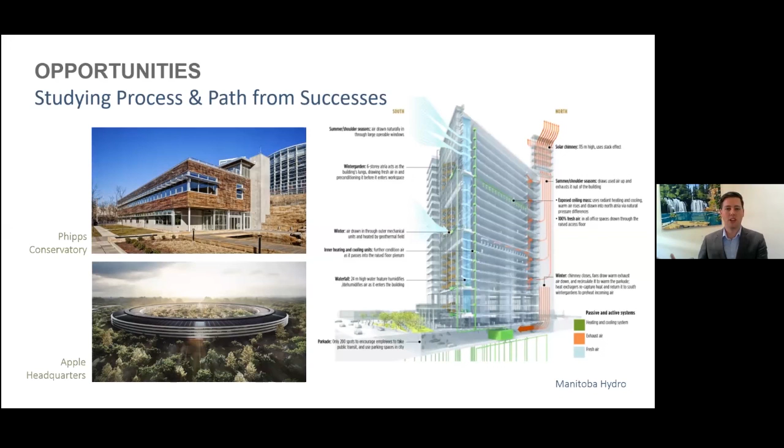Find projects that have successes and then identify ways that they were successful. So call people, try to find resources on the internet, and not necessarily what the end solution is, but more the process or the path that that design team went through to come up with that final solution.

And this was one that I think is really challenging within Branch Pattern, but also challenging within our industry: we have municipalities that are pushing us, which is fantastic, to energy efficiency design solutions. Our codes are catching up to that, but from a design standpoint and a construction standpoint, I believe it's going to be really difficult if we don't have a really good plan in place to hit those goals that we have to get to net zero carbon or net zero energy.

So next poll question here is, if you can pull that up, Danny, how many projects do you set goals for occupant comfort, health and wellness, energy, and long-term costs?

I see that I have skipped over a poll question. Sorry, I don't mean to leave you guys out here. So we'll jump into another poll question here in just a second. I tried to get to that 70%. Okay, there we go.

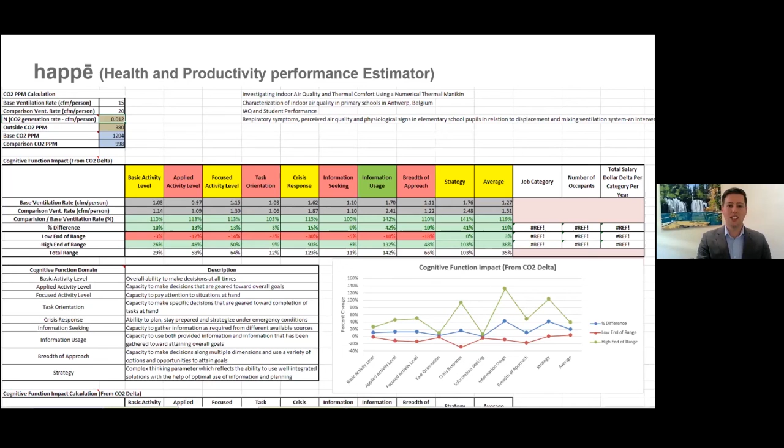So this is a really neat tool that we've been able to use a little bit, and we'd love to use this more often. It's really, really effective for creating great indoor environmental quality, and has the data to back it up.

That same client was looking for really good daylighting in the space, so we took that first calculator, which said we need this sort of quality of daylighting, and we were able to analyze and tweak the architecture to make sure that what we were shooting for was actually being met from an analysis standpoint. And then at the end, which I'll talk about in a little bit, we were able to verify that what we had designed for was actually being met in the end.

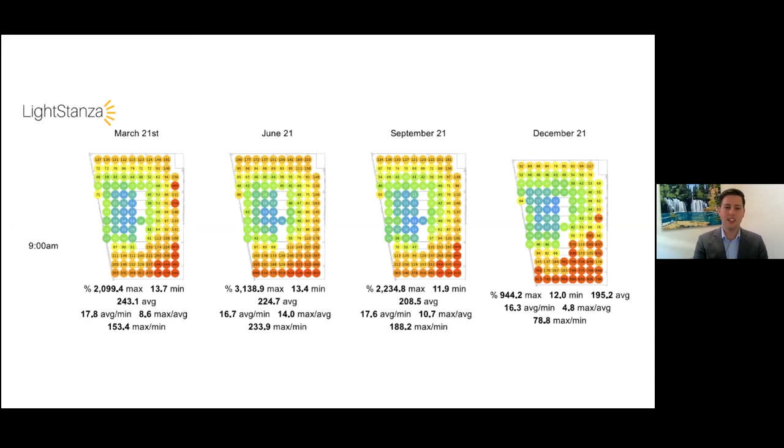Another client that we were working with, similar case, they wanted really good indoor environmental quality for their students to learn. And so our group, and this is not really me at all that is doing this, we have some really, really smart people at Branch Pattern. So Marcel, our anthropologist on staff, he pulled together all of this information to help us understand what was the most effective ventilation rate, where we were not going to increase energy consumption within the building.

So this client had a balance that they required, where we had low energy usage, but really good indoor environmental quality. So that meant that we needed to increase ventilation in the building, which also increased energy. So what we were trying to do with this study and with this data collection was to find that optimal point between the two. And what we found here was that what we should be shooting for is CO2, carbon dioxide, parts per million in the building to be somewhere between 1,000 and 700, and we were shooting for somewhere in the middle, which was about 800, 850. And I'll show you the results of that here in just a little bit.

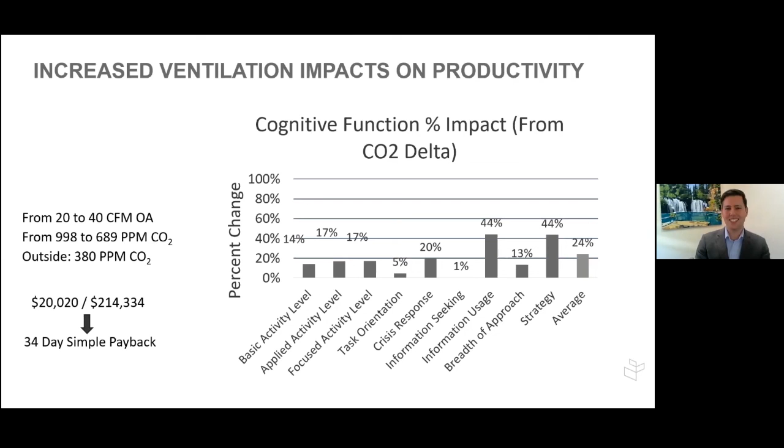The next thing is that everyone on the team must be able to iterate and iterate quickly. And a lot of times that's difficult for especially engineers who are linear thinkers compared to designers who are more iterative thinkers or revolving thinkers. So this is kind of our take on requiring or pushing our engineers and architects on staff to be iterative thinkers. So during the discovery phase, being able to think about a lot of different solutions, come up with a lot of different what if scenarios so that we can analyze and then be able to converge in on a solution.

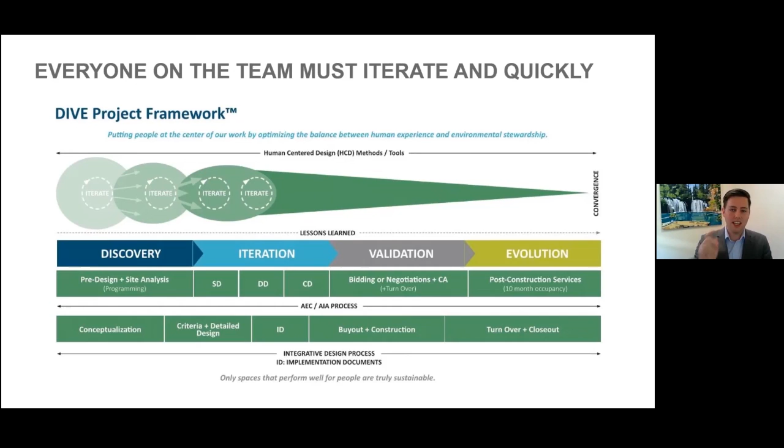I won't go into much more detail about our DIVE project framework, as we call this. But if anyone wants to know more, I'd love to talk more about this down the road. But the idea here is that we're iterating, and we're iterating quickly so that our analysis and our data is actually being used to inform the design. What oftentimes happens is the data is slow to get to the decision makers, and by the time it does get over, the design has already iterated 4 or 5 times and is past the opportunity to be effective.

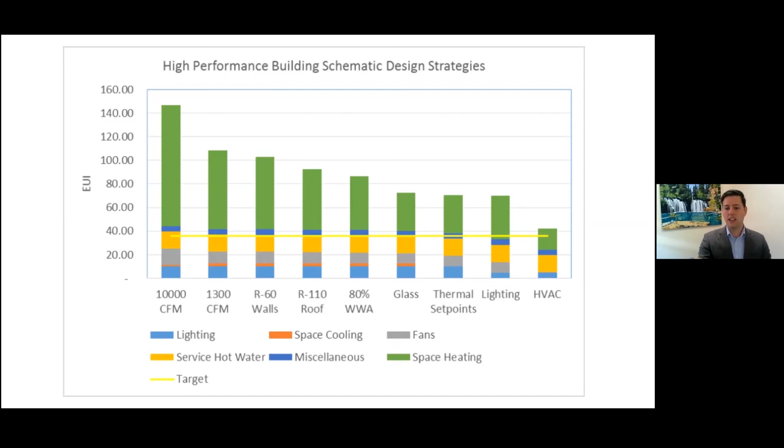So here's one example of a project that we were working on where energy was the driving factor. The goal was to create the lowest energy consuming building that we could. And it had a kitchen in it, which if you're an energy follower, you know that kitchens use a ton of energy. So that was one of the places that we focused on first. There were a number of interim iterations between each one of these bar charts, but you can see the impact of each iteration that created this low energy consuming building.

Here's another quick example of iterating on geometric changes, architectural changes, really. So the goal of this project, which is up in the mountains in Colorado, just outside of Boulder, the hope here was that we were going to use no heating or cooling in the building. That's the best mechanical system, right? It's one that doesn't need heating or cooling. And so that was our goal here. So what we were looking at is how can we provide natural ventilation for cooling, and how can we super insulate the building so that the internal gains and the gains from the sun can heat up the space and allow us to float through the night.

So we were looking at the minimum temperature in every room throughout the building, and through a number of iterations, we were able to get the internal spaces, the lowest temperature, to be 63 degrees in that climate zone. So this was kind of a new way of coming up with data, but since we had that goal in mind at the beginning and we were able to iterate quickly with our design team, we were able to come up with a really good solution that made this project pretty special.

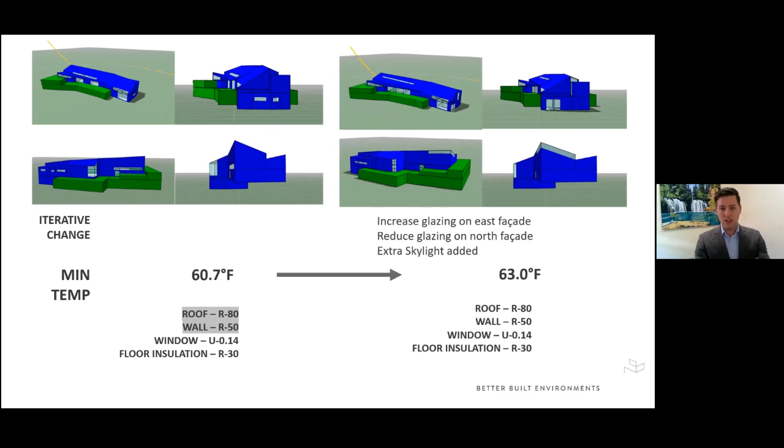And then finally, just a quick plug here in this little section is Cove Tool. If you have not heard of this tool, it is a really neat and robust tool that we've been using internally for really early conceptual design strategies and iterations. So it kind of helps at least limit the field or define the field a little bit better on different envelope types, mechanical systems, cost, EUI.

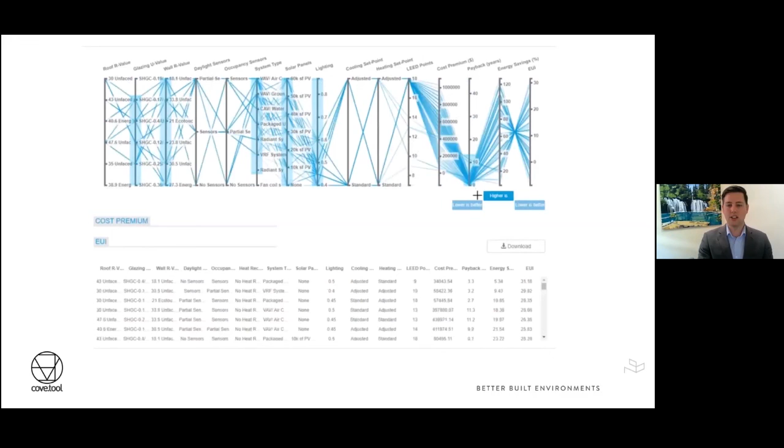So what you can do is plug in all of this information and then narrow down your field of what's most appropriate or reasonable to use within the building. So if you'd love to know more about that, that is a great tool. Check it out. It's cove.tool, and it's pretty user friendly.

So this was kind of a catch-all, but something that I saw made projects special, and I saw someone in the comments state this too, is having people on the team who think holistically about the building, not just within their silos. They can connect the dots for the team. Analysis groups are really good for that, or specialists on the team who can kind of jump between two different disciplines are just really valuable to have on teams, because they can see those connection points.

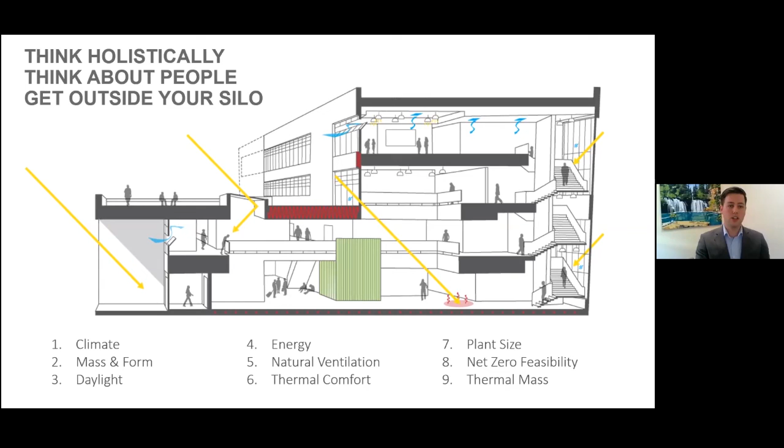So think holistically, thinking about people too, because our buildings are designed for people, and getting out of silos is really important. So I'm going to quickly go through just a case study of a project that we worked on,

and this was something that I actually created for this presentation here. So it's a library project. It's 20,000 square feet. This is a theoretical project, and pulling all of this data together, this one iteration took 30 to 40 minutes to get this information together. So it's not a really big effort to try to pull together all of this information, but it is really valuable, I think, and that's what I hope you get out of this.

So it's in rural Colorado, which is not a town; it's just outside of the cities, where the codes may not have caught up with today's current code. So you can see we're using ASHRAE 90.1 2007, and some of our insulation values or envelope values are located here. System, let's say we had that figured out as we were going into this analysis, and we're pulling costs from RS Means. So walking through this scenario, this is something that on every special project, if you will, we've done this sort of analysis on.

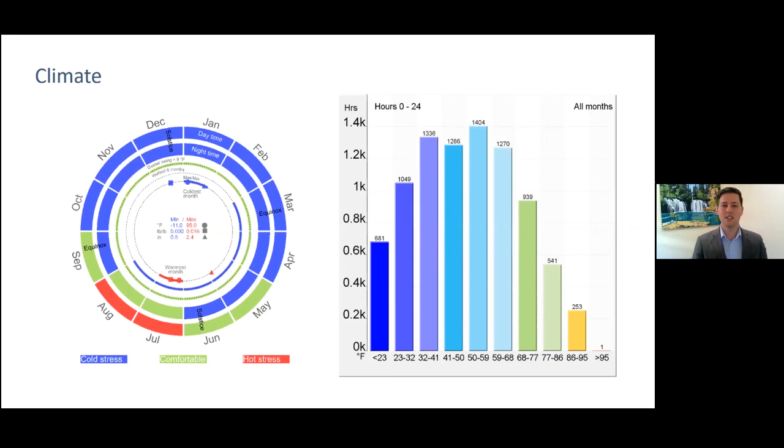So the first thing is looking at climate and really looking at opportunities within the climate to be able to work with the environment or work with the climate rather than trying to fight against it. Now, there will be some of that, right, on every project, but as I said before, the best mechanical system is no mechanical system at all, or a very small mechanical system that doesn't have to run very often. So looking at the climate for opportunities is really, really valuable.

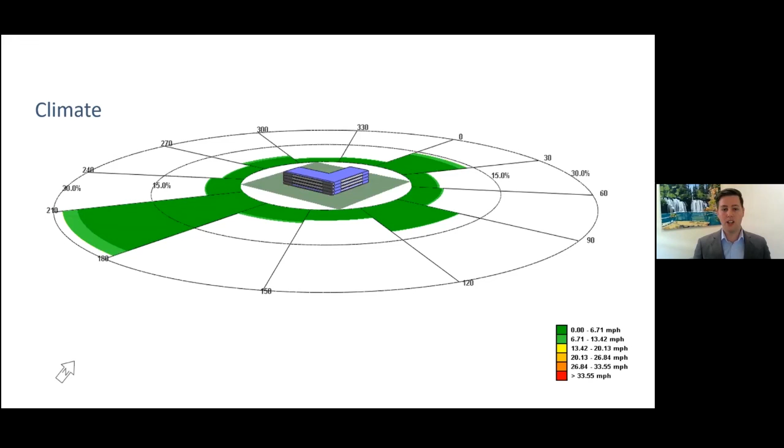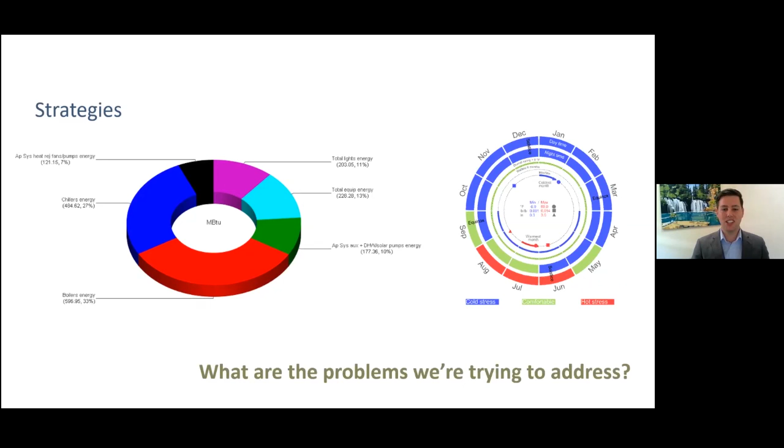Looking at wind within that climate, can we use the wind to our advantage? Do we need to block the wind for our advantage as well? So looking for some of those opportunities within the climate. And then looking at the building and how that building type is going to react to the climate and to the occupancy within the building. So really getting a good, firm understanding of what we're trying to target and where the problems may exist within the building. So here we can see boilers and chillers are going to be a pretty big target point or an opportunity for reduction here. And lights too.

So taking the time to orient the building and create different massing schemes, which is something that I'm sure a lot of you architects, 57% of the field out there, are doing. You're looking at different options. A lot of times we get constrained, right, on sites that are within the city, but if we're out on a greenfield site, we're looking at different massing and orientations.

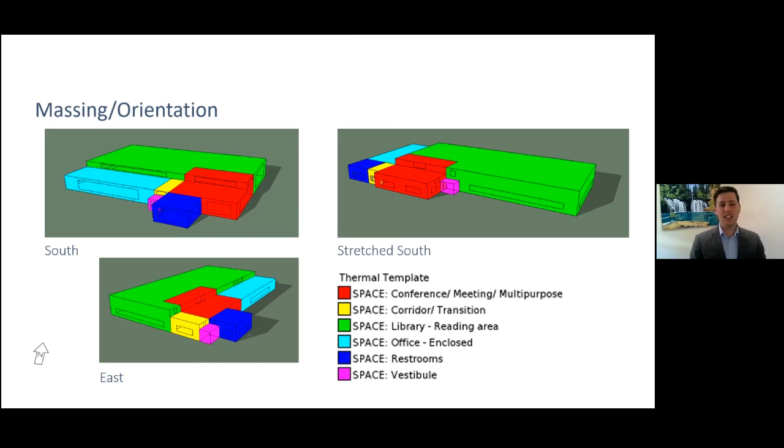So this is a really quick and easy way to understand how different orientations and massing are going to get different energy consumption values out. So we can see here, just by moving some of these different pieces around, you're able to get different energy consumption. So on this, by a show of hands, how many people tend to do energy analysis on their massing and orientation studies kind of right at the beginning of the project? Is that something that's designed into your workflow?

Great. Seeing some hands there. That's great. Awesome.

So being able to quickly do these studies early on can create, again, here, this is only 5% energy savings or something like that, which doesn't seem that significant. But down the line, when we get into mechanical system or active system design, saving 5% across the entire building just by changing a mechanical system is going to be really costly.

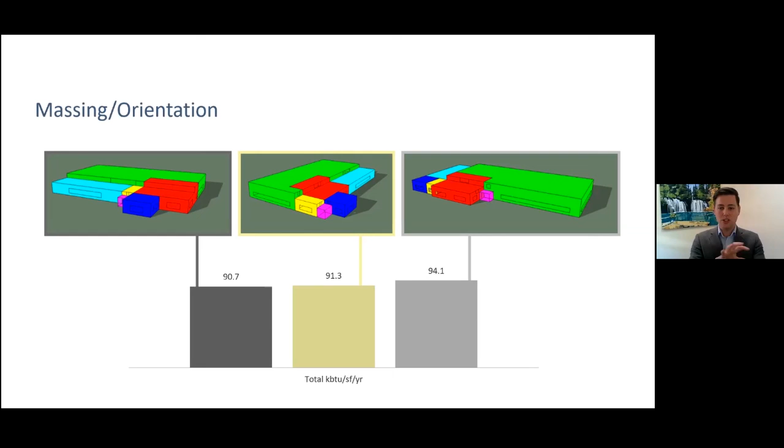Going from rooftop units to a heat pump system, that could save us 15-20%, but there's a really big cost delta between the two of those. So here if we're just moving pieces and parts around, the cost is not that significant. So this is a really good way to save energy free or at less cost than doing other active systems.

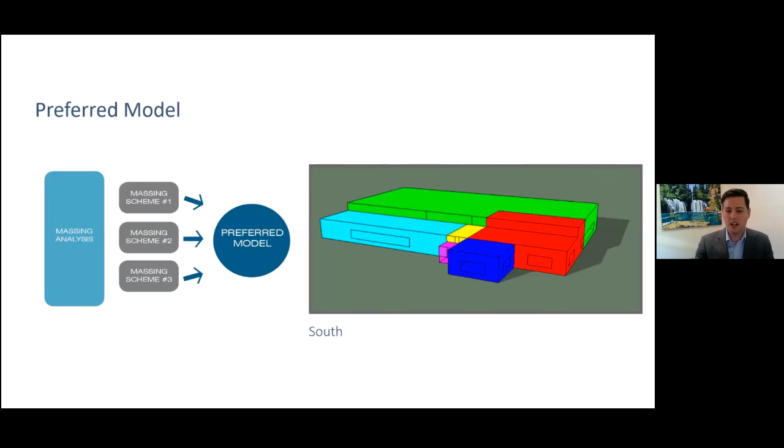Okay, so let's say that we pick this south-facing office model, which is that kind of light blue color, and dive into window-to-wall ratio studies. This is again a really good way to just get some parameters around how the design can be optimized or function best. In this scenario, for this location, we have a point of inflection, if you will, here at 50% window-to-wall ratio.

So you can see the more glazing you have on the building after 50% is going to have a significant impact on the energy consumption compared to less. So what we would recommend here is that going above that 50% point is probably your stopping point, and it's going to be better if we can stay down towards that 30 to 50% zone.

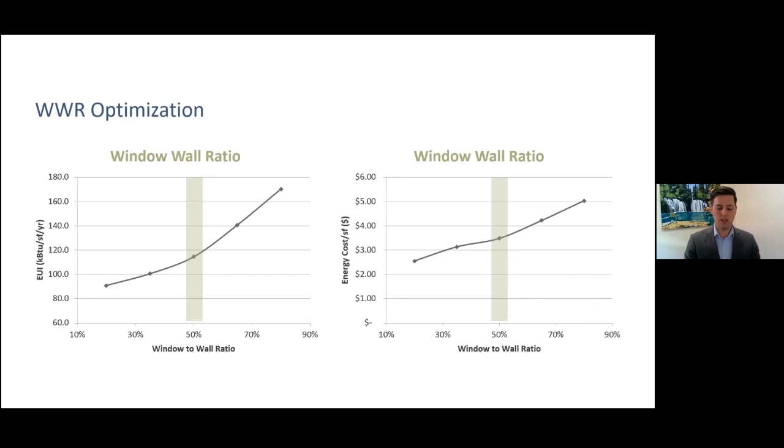And then also looking at daylight. Now, these are not great graphics, so bear with me. We've got some other tools that create prettier graphics like the one I showed earlier, but just for a quick hit iteration, this is something that can provide us really good data to make decisions on.

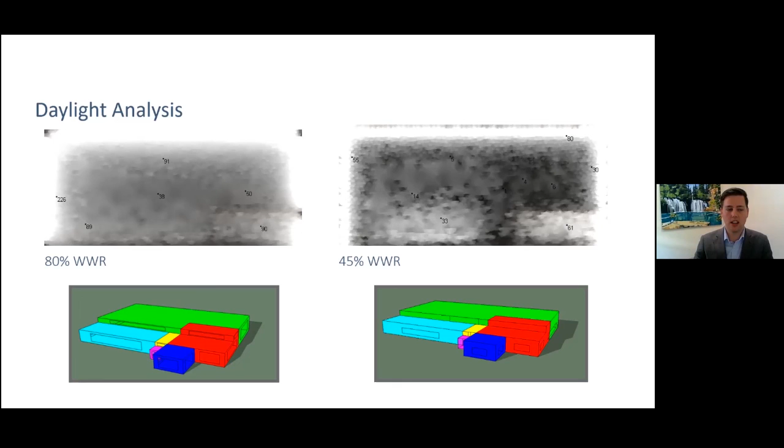We can see here if we are going to do less than 50%, we're going to have some dark spots in here. And we all know daylighting creates better cognitive function. It creates happier occupants. So that's something that we need to take into account while we're designing the building too. So holistically looking at this is really important. Whereas if we go above 50%, we may have some glare issues within the building. So being able to take that data and put that data to work, I think is really important.

Insulation versus energy consumed. Again, we can see we have an inflection point here, which is actually about where today's current codes are, just a little bit under today's current code, with exception to the wall. So increasing wall R value here in this scenario was going to be one of the best opportunities, and decreasing the glazing a little bit.

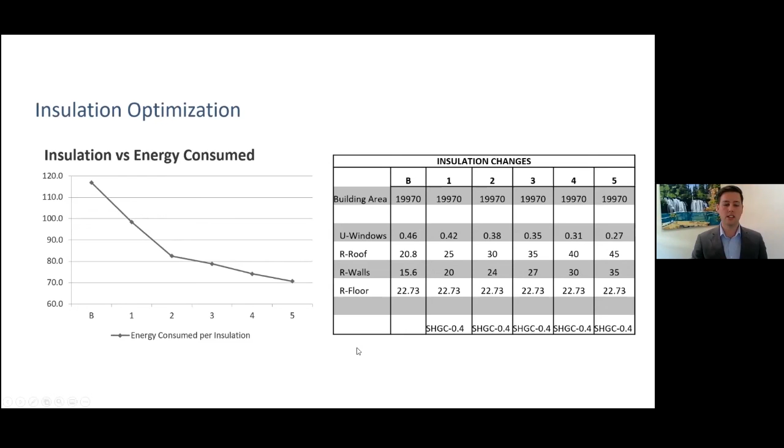So right here is where the rubber meets the road, and where we should see the impact of this data analysis and this data collection. And that's through cost savings or cost sharing, really. So whenever we select that insulation number 2 scenario here, we can see what the payback is with these different insulation rates here. Those two line up.

But what we find is if we do go to the insulation 2 value, our energy cost savings is almost $15,000. But where it really helps us is in the plant cost savings. We can downsize our heating and our cooling plant. We can downsize our air handling unit. And those are costs that really should be factored in to all of this data gathering.

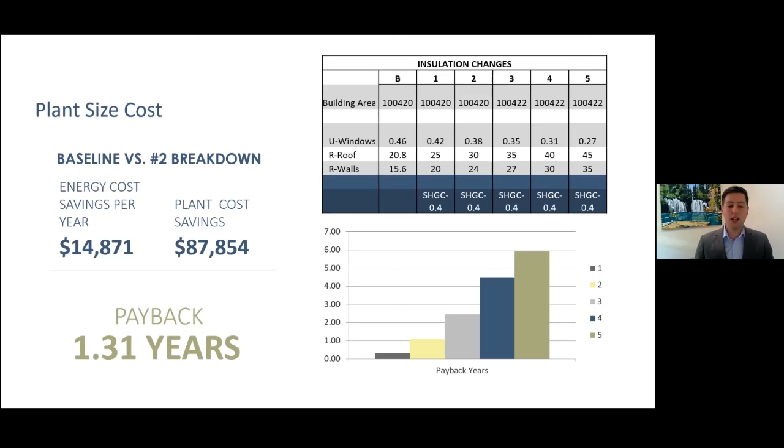So whereas simple payback by just accounting for energy savings is maybe 10, 12 years, factoring in that plant cost savings gets to 1 or 2 year payback. So again, what we're doing is cost sharing. We still have the same total budget, but the amount of budget that's going towards the mechanical system is less, and we're able to put that money into the envelope system, which is going to last a lot longer.

We've seen studies here recently that show in a lot of rural areas that really super insulating the envelope and creating really simple mechanical systems actually has a cost neutral end result, but energy efficiency goes way up, so we're way more efficient, and maintenance costs go way down.

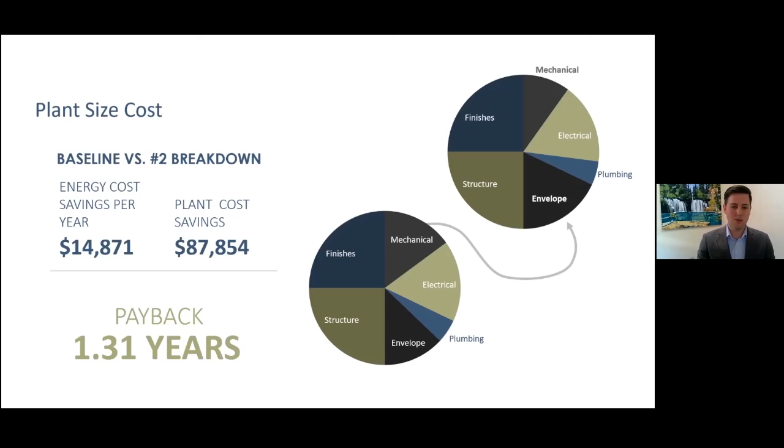I'd love to hear from you on that.

And then this is the last thing that we came up with here: to verify that the goals we were shooting for were achieved. We talked about that a little bit earlier in the presentation, but this is a really key component to understanding if the analysis that we're doing is correct, if the goals that we're setting are reasonable, to be able to go back and check and verify.

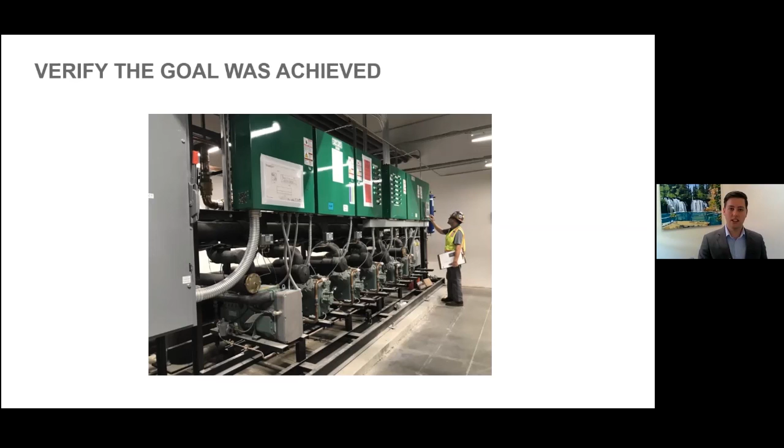So our commissioning group and our internal engineering and analysis teams have started an initiative that requires that, A, we set a goal, and then B, we follow up with that goal and capture that data so that we can make even better design decisions on the next design or the next commissioning project that we're doing.

So here's a project that was brought up previously where the owner wanted really good indoor environmental quality, but they also had really aggressive energy goals. On this project, we went back in and analyzed how their CO2 parts per million were lining up with that. I think we were shooting for somewhere between 700 and 900 parts per million, so 800 is kind of that middle zone.

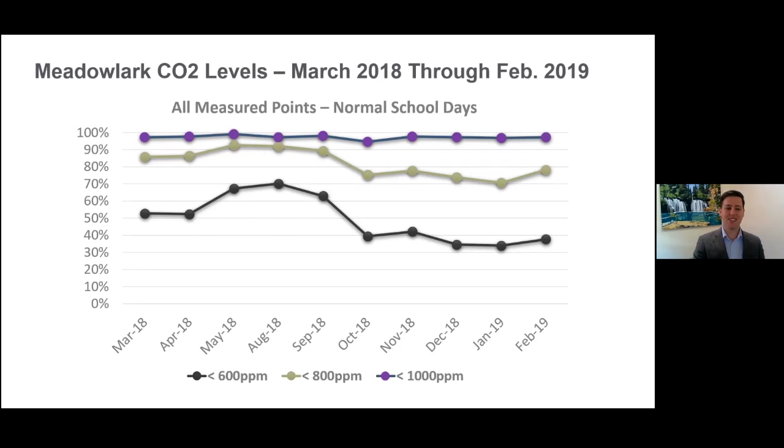And the other piece of this was really good energy consumption. We had a goal of 25 EUI, which is measured in kBTUs, an energy consumption per square foot per year. An average building would be about 79. On this project, the goal was 25. The analyzed data was 27.

Through the modeling process with one of our partners, we found that 27 was what we thought we were going to be able to achieve, and the building is actually performing at 30. Now, I really think that some of that 30 number is based on the operations of the building and things getting up to a consistent state. So I'm hopeful, and check back with me in a year or so, that number goes down to that 27.

But what we were able to do here is move the goal, because we had this really aggressive indoor environmental quality requirement and this really aggressive energy target. So we were able to find that optimal point. We were able to restate the goal and say, okay, instead of 25, let's shoot for 27 so that we can increase ventilation air and try to hit both of these targets. So that made that project really special.

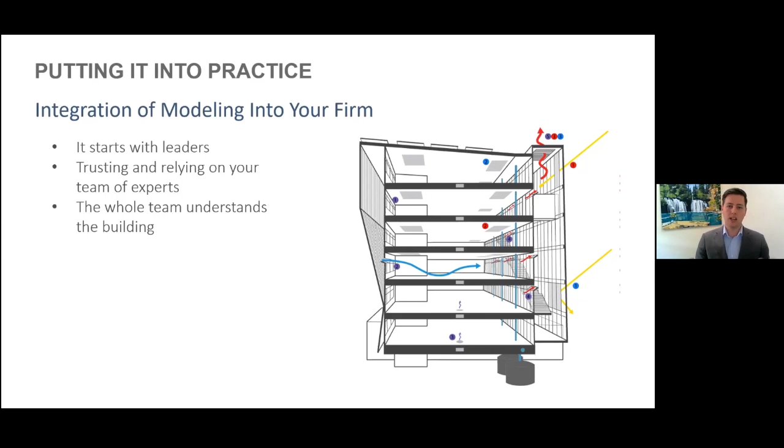So you may be thinking, hey, Mons, this all sounds great. This sounds like a really good pitch for Branch Pattern to do data analysis on every project. And that's exactly right. No, I'm just, I hope you're smiling out there.

So yes, we love doing data analysis on projects. That's very true. But what I'm advocating for here is not that Branch Pattern do it on every project. What I'm advocating for is that every project have analysis done on the project, because this data is so easily accessible, and it's really effective. It really affects how we do design.

So we've seen and experienced really successful projects where the analysis is done by Branch Pattern, or in the architecture design team. We have a client who does their own analysis and helps that data drive our design team. So if nothing else, having someone on the team be dedicated to analyzing and figuring out these what if scenarios.

I keep saying what if scenarios, and those are just, when you're in a design meeting saying, hey, what if we do this? What if we do that? And being able to have data quickly to help make those decisions is really, really impactful.